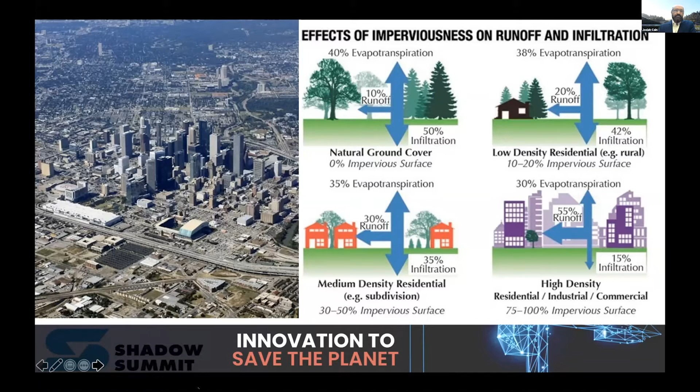So I'll stop there, but I think any of us could probably go on and on about what's broken about cities. We've kind of been talking about sustainability and how to bring a lot of this back together for quite some time, most of us. We're looking at some pretty innovative things.

What we're finding is this irrigation can also do a lot to cool down the city without having to use tremendous amounts of energy. There's a reason we have brownouts during heat waves. It's because we use water and electricity to cool ourselves down. We all know that, I think.

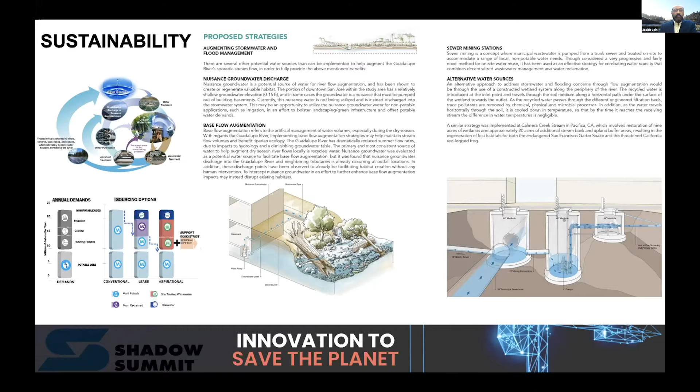We're also looking at how to do storage in ways that mimic natural process. Once again, we're still kind of in the warm-up here looking at sustainability and maybe we'll move to resilience. These are things that I think everyone who's listening probably already understands to some extent.

An advanced version of sustainability, you're storing 8 million gallons of rainwater at a Google campus in this case in large ponds that you've now engineered hydroperiod type for native plants and native species to utilize. Suddenly it's sort of a triple duty: engineering for water supply, landscape architecture for amenity, and ecology for native species and resilience of the biosphere. So to me, that's pretty advanced, and we thought we had kind of arrived at this kind of thinking,

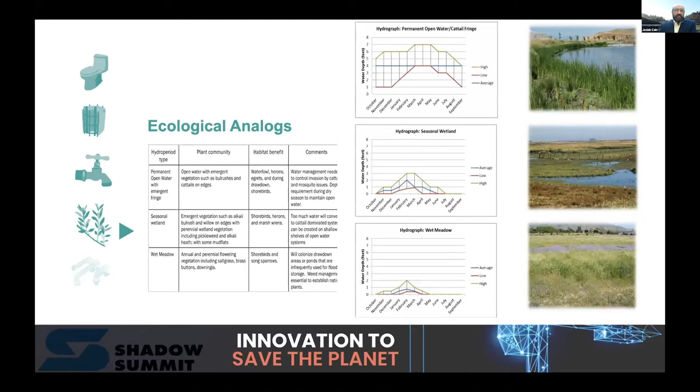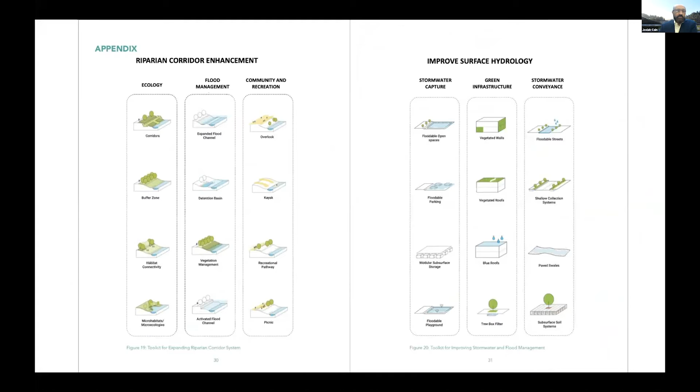applying similar types of things to Hudson Yards deck landscape, creating toolkits. How can we apply these in sort of a thumbnail-y kind of way? How can we communicate these ideas? What are different ways that we can support ecology, different ways that we can support flooding, et cetera, stormwater capture, stormwater conveyance. Hopefully, as design professionals, most of us have experienced this approach.

We're now at a point where it's not good enough. So we're finding ourselves sort of wandering around looking at cities and talking to a lot of architects and urban designers. And the general consensus is not sure what else we can do. We've been making buildings better for 20 years and they're awesome. And they are. Buildings have become incredibly efficient.

The material cycles, everything from prefab to 3D printing of buildings to sustainable materials, whether it be rammed earth, mass timber, buildings are becoming incredibly sustainable and to some extent resilient. But we still have issues where the city is still underperforming. And I think there's a mentality that it's a little bit of a mystery because everything's gotten so much better. The cities are so much better. We're thinking about better transportation.

So as civil engineers, we started asking, what about your site metrics? Do you have urban site performance metrics? How's the city itself performing outside the building? Blank stares. That's put us on an amazing mission to try and understand what are urban site performance engineering metrics? How do we make it work? What do we run into?

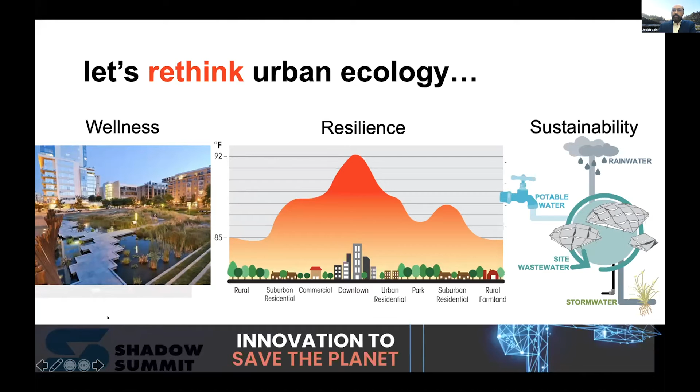And the thing that we really have found is that wellness is a huge driver. And we're not the only ones that are going to say that, but I think that we're going to probably show it to you in a slightly different way.

Traditional wisdom, I think when we all got into sustainability, we found ourselves saying, for a little bit of extra building cost, capital upfront cost, we can get a big return. It's going to pay itself back and it's going to be amazing. Not wrong. At a certain point, that became an operations and maintenance cost. And we're realizing that operations and maintenance are 10x the cost of the capital initial payment over the life of the building. And that's great. We've been responding to that as an industry.

What we're learning, or really what we're incorporating, I think, as an industry now, once again, this is not news to most of you, I hope, but the salaries in a commercial building are 100x the initial capital investment. And so cutting corners in your capital investment, but losing performance from the inhabitants of the building is a catastrophic financial mistake if you have the ability to make that investment up front.

And what we're finding is through biophilia, it doesn't matter if you're talking about a school or an office or a home, interactions with nature, cleaner air, natural daylight. Once again, I hope that I'm preaching to the choir, and I think I am. We're all discovering that human wellness, human performance, human productivity turns out to be much more important in the long run than just talking about the building and its sustainability, or even the long-term payback and O&M over the life of the building on the energy and water side, for example. But trying to understand how these things actually feed one another and how it's the same goal is, I think, where we're headed. And I think it's what we're all trying to figure out.

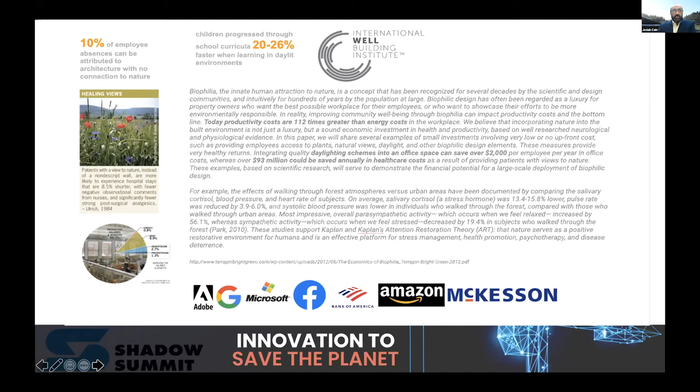And whether that's a purely digital generative algorithm, which I've been very impressed with and also very frustrated with, because people still make decisions about which inputs are prioritized. And so, the computer has a hard time prioritizing the inputs. And so as human beings, we're constantly learning which inputs are important.

I've worked on projects that had extremely advanced digital design at the multi-million square foot scale. And out of the 1,200 design iterations that got churned out, none of them prioritized ecological site design metrics or the benefits associated with them because they were clipped out. So the computer can't make those decisions for us. So we have to understand what the priorities should be, and then we can use those generative tools incredibly well once we know what to input or what to prioritize.

So we're starting to learn that overheating of cities is costing us a tremendous amount of money. Arizona State is coming up with these numbers of $10 a square meter. And that's for optimizing landscape systems for temperature-based irrigation control. So the irrigation control is not based on plant needs, and it's not even based on soil moisture. It's based on temperature. If it gets hotter, you apply more water, the water evaporates in the landscape across a block or district scale. The more solar radiation you apply to a wet environment, the more cooling actually occurs.

Same principle as a cooling tower. More energy evaporates more water in the same amount of time. You get more cooling. Solar radiation actually does that as long as the landscape stays wet. As soon as it dries out, then you start to get heating. But as long as you keep applying moisture to a landscape, the more solar energy, the more cooling effect. So this becomes really interesting because if you have sufficient inexpensive water, then you can basically get a tremendous amount of cooling and evapotranspiration from plants and even damp landscapes of any kind.

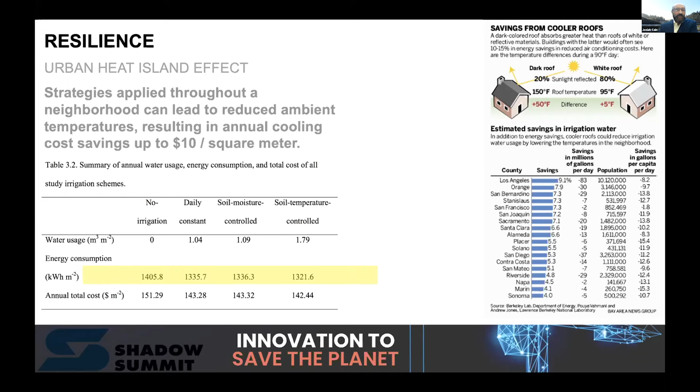We are newly looking at some figures, and I'm not making any promises, but the first run that my team made comparing the cost of cooling a district or a city using landscape metrics versus cooling a district or a city building by building using conventional cooling: twice as expensive on the aggregate to cool the city building by building as it is to cool it by making a high performance landscape that lowers the ambient temperature. I can't say that's going to hold. I told my team if they're off by 80%, I'm ecstatic because I'll take a 20% bump. I don't know where those numbers are going to land, but we're continuing to look at that.

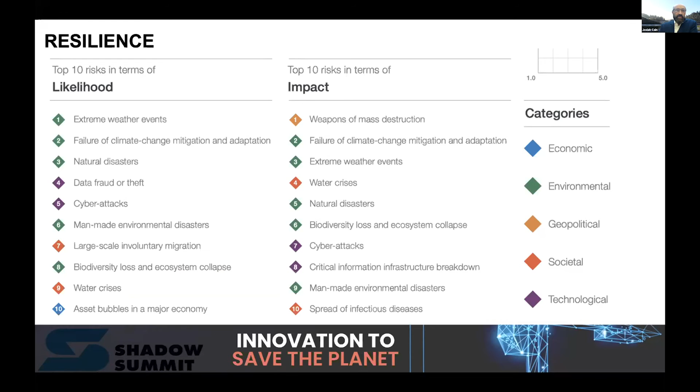If we look at resilience factors that are going to affect human beings, environmental are close to the top everywhere. And a lot of these are related to urban heat island, which kills more people than any natural disaster in the United States over the last 30 years. And I can get into that. In Europe, 2003, 30 to 70,000 additional deaths due to heat wave. Comparing that to some of the biggest war events we've had even, right? This is a bigger threat than hurricanes, earthquakes, tornadoes, flooding, and our cities are artificially hot already, and we can only expect more of that.

Conserving water by not irrigating and not adding landscape to our cities is actually probably not even going to work. I mean, it'll probably kill more people, but it's also going to drive resource demands for cooling individual buildings far beyond the resource demands to actually cool the city by using ecology. So trying to figure out how to get ecology back into cities from a performance point of view so that human beings can be healthier.

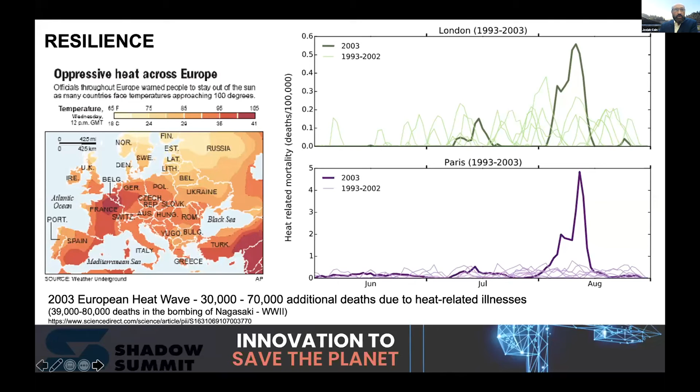It's all connected. So putting building performance at odds with human wellness is a fool's errand, the way that we're evaluating it at district and city scale from a civil engineering and site engineering, site performance standpoint. So we're starting to integrate these things and understand how to incorporate these elements that are shown to improve human health and wellness, as well as human performance.

So less sick days, arriving to work earlier, leaving work later, taking shorter lunch breaks, getting more done while at work. These metrics are well executed and well studied. Faster recovery rates in hospitals, better retention and learning in schools. Across the board, this has become a very well-developed area of study, and there are PhDs all over the country working on it.

What we're trying to do is understand what kind of engineering performance we can get out of these same features that we can then put into cities, and really our model is building three scales of human wellness and ecological performance and how they relate to each other. The human scale is individual, and we can start to think about what those are. Experiential: how do you get calming, how do you get better air quality, things that affect each person.

The community scale has to do with, you can't really optimize your personal wellness unless you're part of a community that's healthy. And what can we do at community scale? And that could be neighborhood scale. These could be neighborhood resources. We've talked about some of those things as well. Connectivity and pedestrian and bicycle mobility also play in heavily when you get into these community scales.

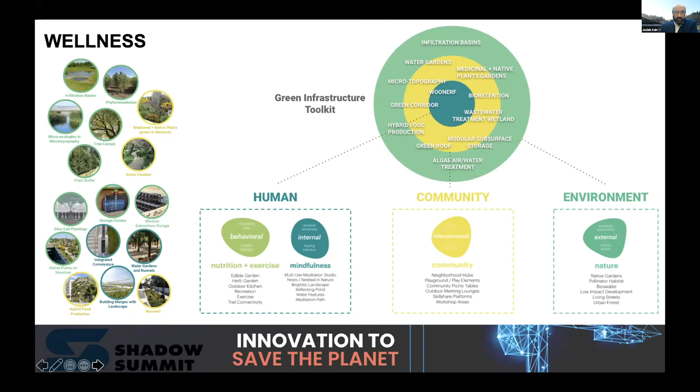Integrating all these things into an engineering and human health and wellness platform that pays itself back on an employee performance, student performance, patient performance basis. And translating and transferring these things onto actual projects. Super fun, super exciting. Everyone that we run into ends up being pretty lit up because there's not really a downside. It's just difficult to pull off. And we're in that early stage where you're paying people probably more than you would pay them to do what they already know how to do, to figure out how to integrate some very complicated overlapping benefits.

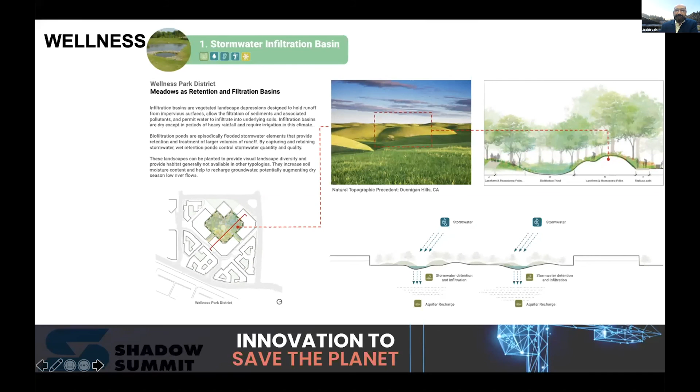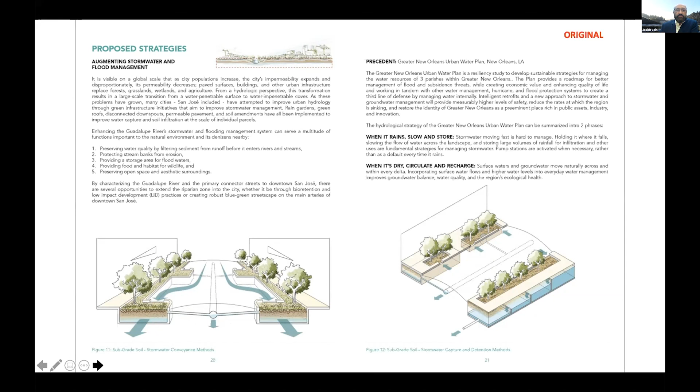I think I already showed these, so I'll keep moving. And once again, just looking at how we can start to integrate water, air, habitat, and other ecosystem services and environmental processes into a very controlled, very engineered, very predictable urban fabric. It doesn't have to be messy, but it also has to be relatable, and it has to be part of a fantastic and fabulous design. So we love working with amazing designers who can take these toolkits and apply them in ways that people enjoy. So I'm going to land here.

This is a study we're doing in San Jose, California, studying what an urban canyon might look like, where we have flooding problems, we have stormwater and water quality problems, we have urban heat island problems that are worse than usual. We also have social issues to deal with. There's a myriad of things going on. Trying to understand if we can contextualize these. There's a unique opportunity right now in San Jose because Silicon Valley is very successful.

Some of the biggest companies in the world are moving into San Jose's downtown, and these companies are highly valuing human health and wellness and understand the relationship between nature experience, or at least outdoor experience, environmental experiences. Seeing birds out your office window is part of a whole matrix that has been presented to us by some of these customers as a high value that helps them attract and retain, also helps them achieve and innovate. So we're deep in trying to understand how this all works and looking forward to doing that, hopefully with all of you.